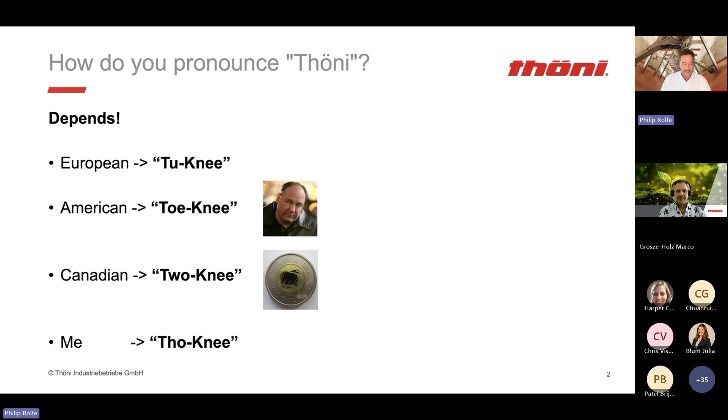How do you pronounce our name? Ever since I started working with Thoeni about 10 years ago, there have been a lot of quizzical looks about how to pronounce that for most of our North American compatriots. It really depends - if you're European, familiar with the O and the two little dots above it, you say Thoeni. An American might quite often say Tony, considering Tony Montana, Tony Soprano, and of course Canadians give homage to our $2 coin, Toonie. Personally, I go Thoeni, but whatever you call us, we're here to help you with your organics challenges.

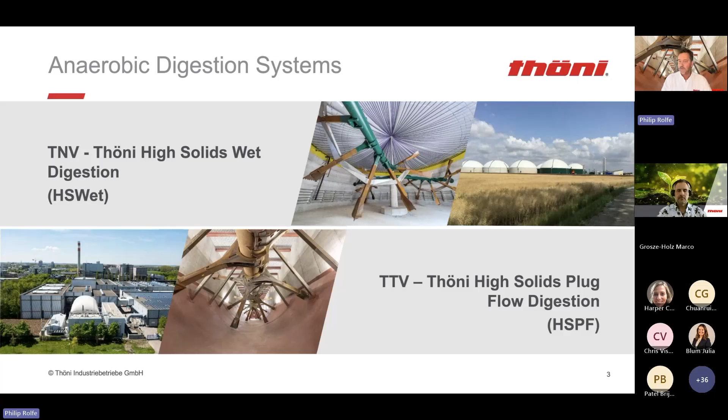Thoeni has been in the environmental business for over 30 years now, and we're really known for our high solid anaerobic digestion systems. We have both a high solid wet system, called our TNV system, and our TTV, which is our high solid plug flow system. Both are characterized by a very robust agitation mixing system, which you need to manage those high solid, high impurity feedstocks that we see in a lot of urban and agricultural settings.

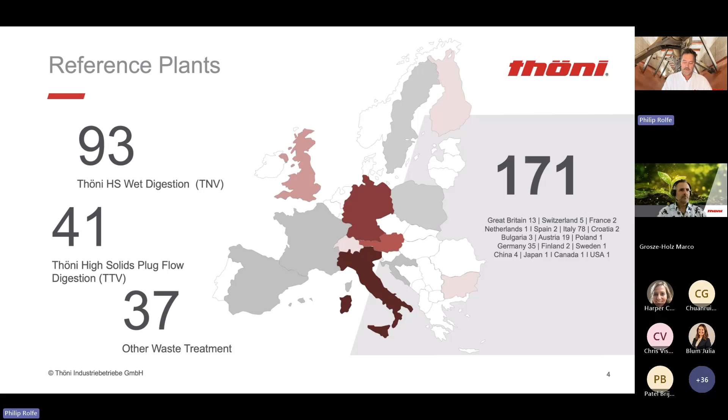We've been very successful throughout the world with our systems, primarily in Europe at this stage. We have 93 different sites handling our TNV system, our high solid wet digestion, and 41 of our high solid plug flow. So we have a lot of experience with a wide variety of wastes throughout the world.

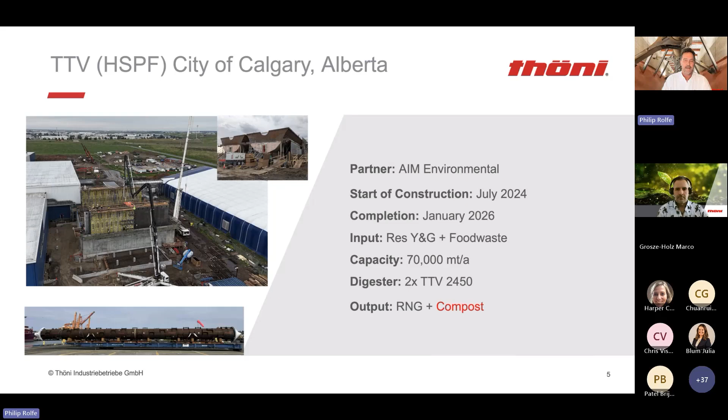To the left, you can see some recent pictures. Our 135-foot shafts, 2 of them, just got delivered to Calgary last Friday. We were happy to see those make it from Austria all the way to Calgary. And here you can see some recent concrete pouring we've been doing at the site as well. Very excited about this project, our first one, and once it's completed, I'm looking forward to touring people through that facility.

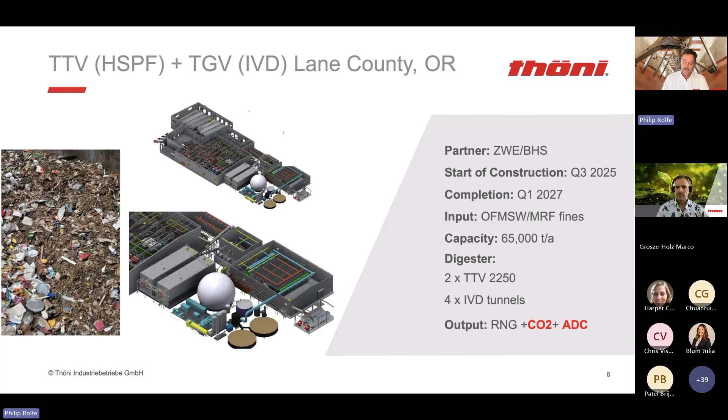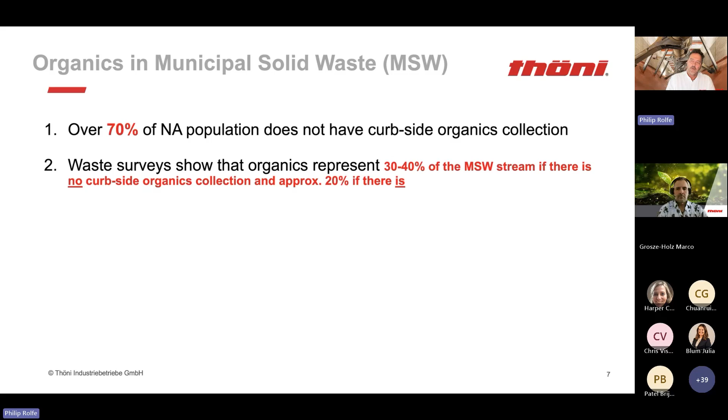What we're finding in other markets where they do have curbside organic collection, there's still about 20% of the total volume of that MSW that is organic matter.

Now, why does this matter? If organics are left in the black bag or MSW stream going to the landfill, there are significant fugitive methane emissions from landfills as a result. This happens with or without a landfill gas collection system, because the efficacy of these systems varies significantly depending on the design, the cover type, the operational practices, and whether it's a closed or active landfill.

It's a significant issue. The other issue with organics in landfills is that they take up space. As you're quite familiar with, a lot of landfills, particularly near large municipal areas, have very strained capacity and limited lifetime. So any material you can remove from that stream going to the landfill helps extend the life of those landfills significantly.

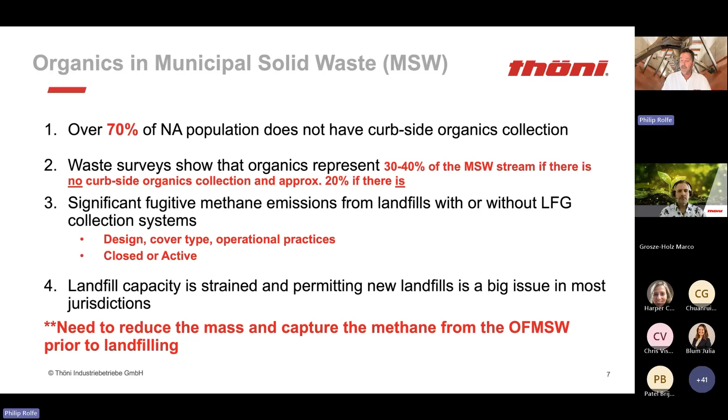As we all know, permitting new landfills is a big issue and nobody wants it in their backyard. So I think at the end, there's a real need to reduce the mass and capture the methane from the OFMSW material prior to landfilling.

Now, as I mentioned, Lane County, Oregon will be a great example of our integrated facility, where we have both a separation process up front, an anaerobic digestion process, followed by an aerobic treatment process.

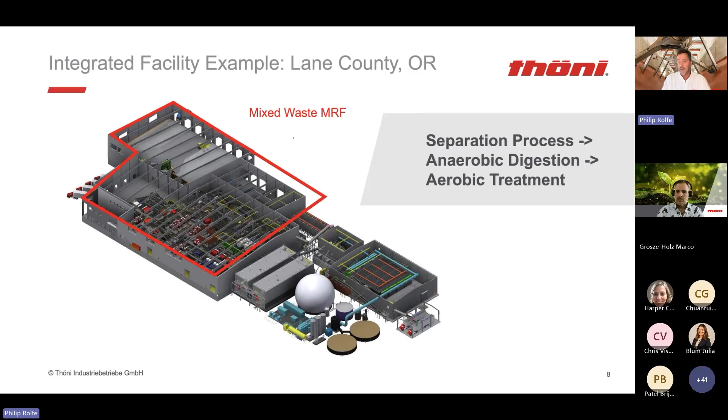In this case with Lane County, the county itself will be investing in the mixed waste MRF - the receiving area, as well as the internal separation processes: grinding, shredding, separating out the recoverable, recyclable plastics and metals, etc. But what's left over is this OFMSW feed, and that's the material we will be handling through the balance of the plant.

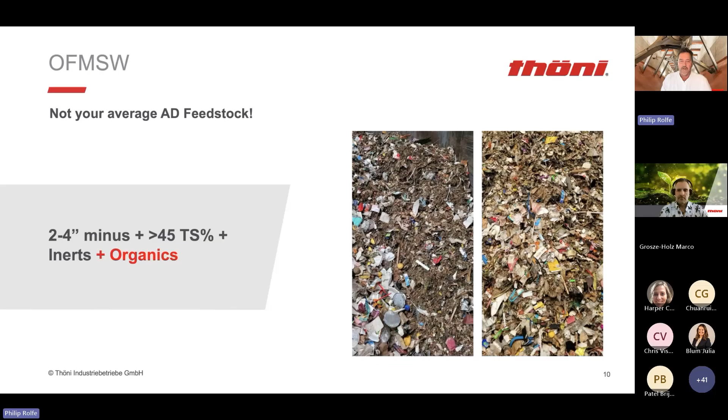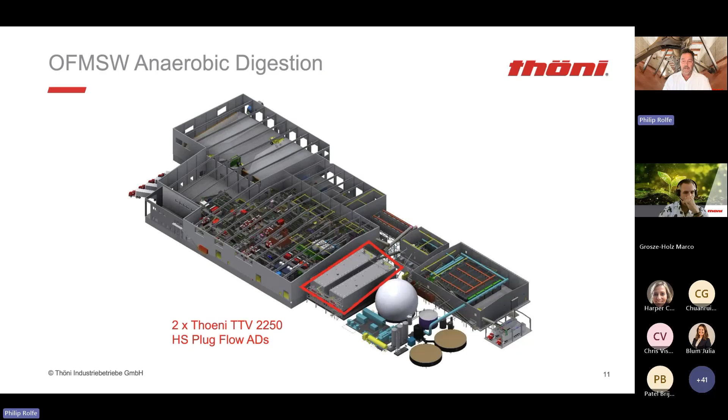It's upwards of 45% total solids, with lots of inerts, as you can see. It also happens to be where the majority of the organics in the black bag garbage are found. To handle this material, we've dimensioned, as mentioned previously, 2 of our TTV 2250 digesters, high solid plug flow digesters. In this case, we used our steel digester version.

The steel digester housings for these facilities will be manufactured in Eugene, Oregon by BHS. We did this for a couple of reasons. Back in the heydays of the IRA and the ITC credits, there was that extra 10% kicker that developers received if they used a certain percent of US steel components. So that worked very well in that case.

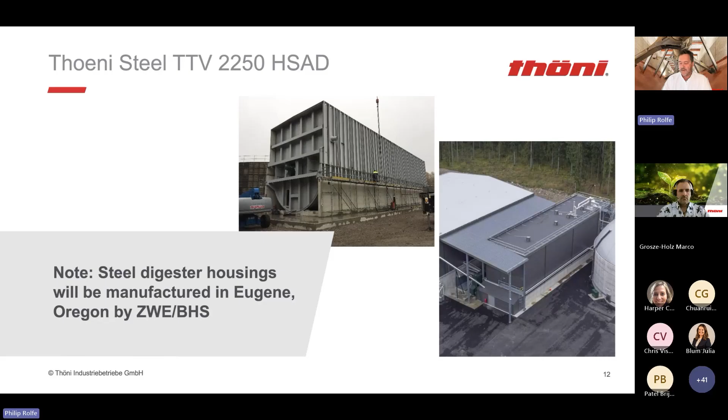But also, given the uncertainty now of the tariff situation, having a domestically manufactured significant steel housing will also benefit us and allow us to manage a little better that tariff costing on our pricing. Now, how do you take that very challenging material and enter it into the digester?

To do that, we have our patented mixer system, which consists of a couple augers that rotate in different directions in a pre-sequenced way. We take into this mixer about 2/3 fresh OFMSW, plus about 1/3 of the mass of inoculum or digestate from the back of the digester, and any other dilution liquid that we need to get that mixture down to around 32% total solids, which is our sweet spot for going into the digester.

The mixer itself has about a 9-minute cycle. Once it's finished mixing all those 3, it drops into the piston cylinder and is piston pumped through a double-jacketed heating pipe. So we get that material almost up to thermophilic temperatures before even going into the digester, and that really helps with the whole process.

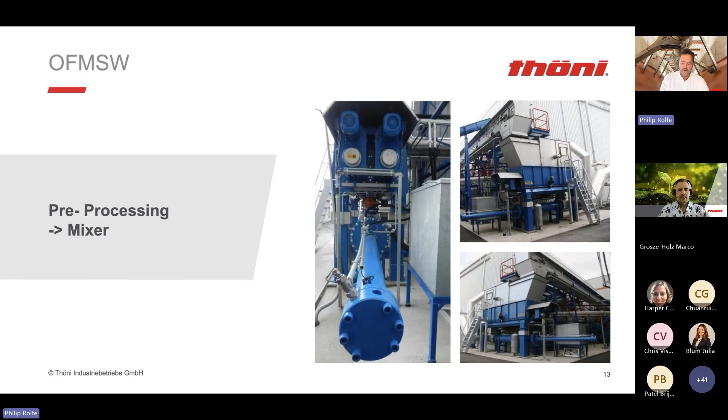Now, once it's in the digester, how do we prevent sinking layers and floating layers? How do we manage all those contaminants in that digester? This is really where some of the benefits of our system really play out. I've got a little video here to explain it.

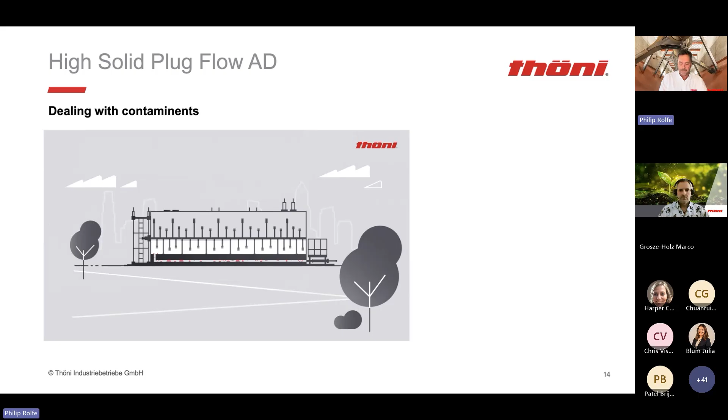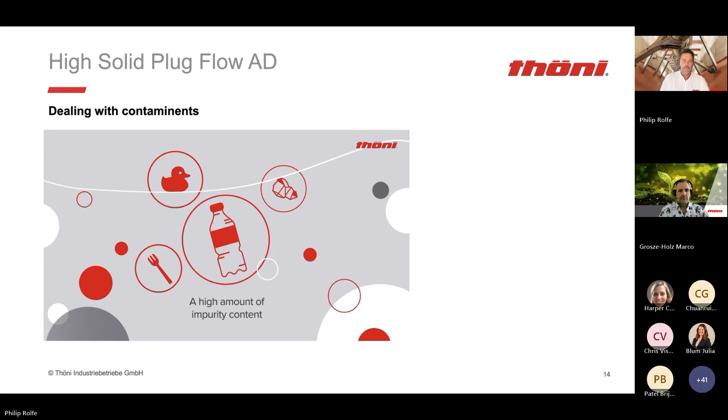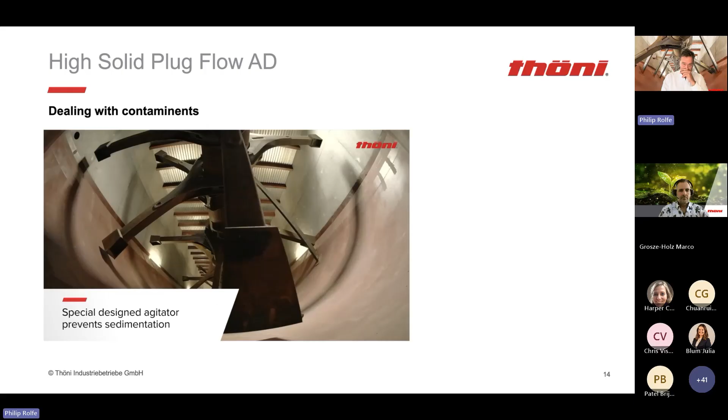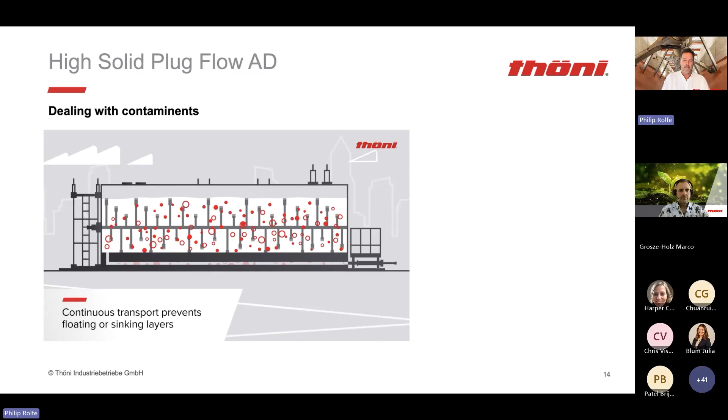High impurity content is no problem for the Thoeni TTV digester. The substrate is fed into the digester by means of a piston pump. The TTV is ideal for the digestion of organic material with a high amount of impurity content. The impurities are transported safely along the TTV digester from feeding to extraction. The special design and configuration of the paddles along the shaft prevent sedimentation and floating. That way, impurities are continuously transported to the digester extraction and have no chance to build floating or sinking layers. This ensures constant maintenance-free operation of the digester, even when the input material contains high impurity content.

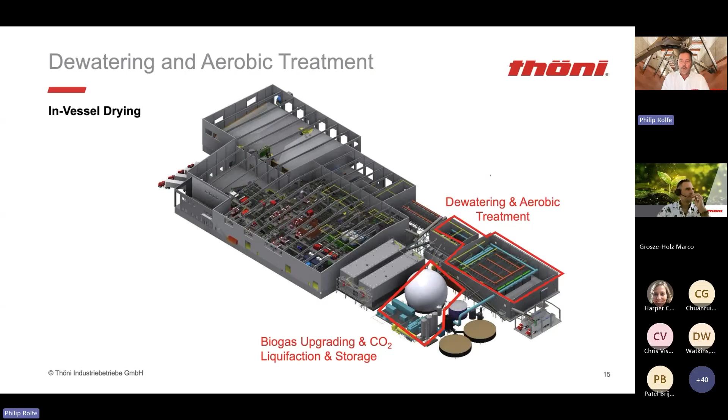After the material has been in the digester for about 20 days average retention time, it's pumped out of the digester, extracted to our dewatering systems, which are necessary. As you can see here, the digestate comes out of the digester at roughly 26% total solids.

We need to run that through a screw press to remove some of the liquids. It's a specialized screw press, I believe a Bellmer in this case. We end up with dewatered digestate having a total solids of roughly 40%. The liquid fraction comes out at roughly 20% total suspended solids.

Now, we do need some liquids, as I mentioned earlier, to dilute down the incoming material. But at 20% total solids, that liquid has too much solid and would create some operational challenges over time as it gets recycled through the system. So we run it through a centrifuge in this case, and it produces a liquid fraction of about 14 to 16% total solids, which is fine and adequate for our dilution purposes.

The centrifuge produces the retentate, which has roughly 35% total solids. That gets mixed with the dewatered digestate as well as structure material into an inline mixer to prepare it for the IVD. I'm going to pass it over to Marco now, and he'll take you from there.

Thank you, Rolfe, for this anaerobic introduction. I want to take you all into my world of aerobic treatment of organic solids.

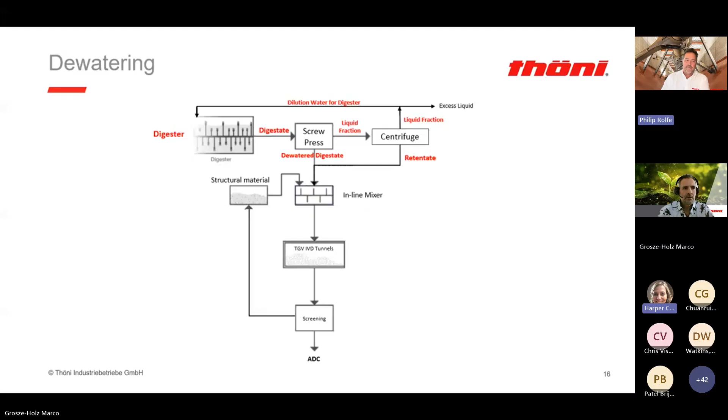So about the aerobic treatment process, where we are in the whole process of AD, like Rolfe has explained in this graph already, we are behind the TTV AD system, where we have the dewatering and the mixture of dewatered materials like retentate and digestate will be mixed with structure material and then filled into the tunnel.

We have automatic filling systems for that, and that's where the aerobic treatment happens. We do that with a fan.

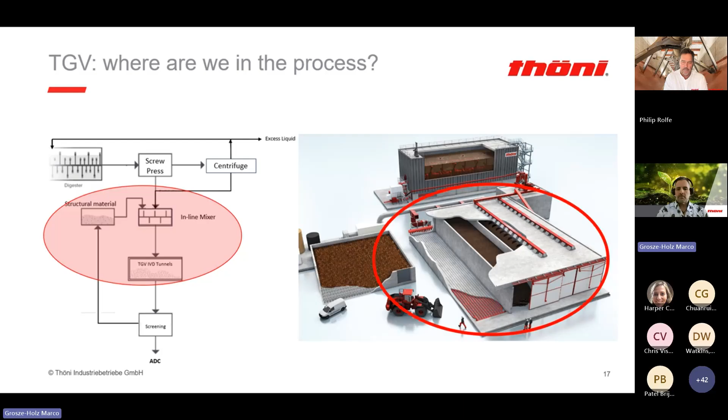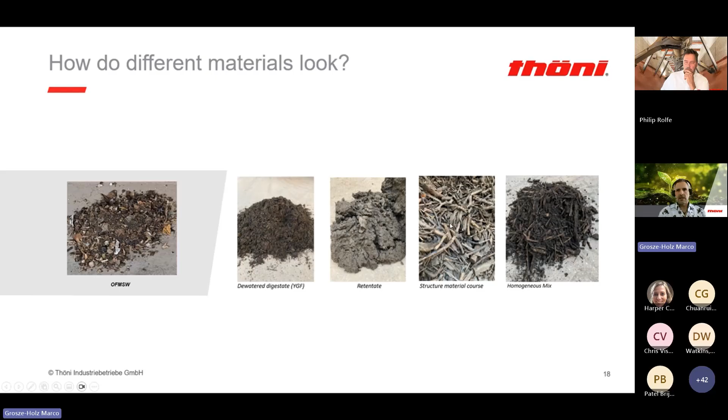How do the different materials look like? OFMSW you have seen already before, like Rolfe showed you. Then we have dewatered digestate. Unfortunately, I don't have any digestate dewatered from OFMSW because it doesn't exist in Europe. We have yard, garden, food waste instead. But it looks more or less the same, except you miss the contaminants from OFMSW. Then you have the retentate, a sludge-like material containing a lot of heavy materials like sand and other minerals. And then we have structure material, and in fact this mix we need to process in our tunnel system. The structure is very important for us because these materials are quite dense, and as we have a process where we blow air through the material, we need some permeability.

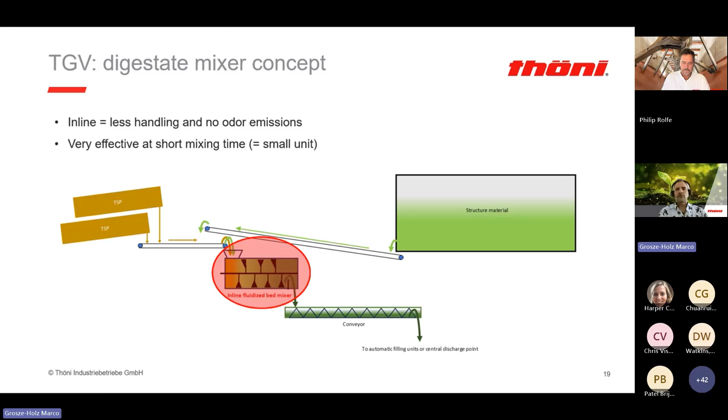How does the mixing concept look like? We have our dewatering, either the screw press or a centrifuge. This dewatered solids will come on a conveyor belt together with structure material, which we store in a bunker, and those together go with the solid dewatered materials into a fluidized inline mixer. We chose a fluidized bed mixer because that gives us the best permeability of the components we mix together. The output from the mixer goes on a conveyor, and then it can be discharged directly into the tunnels, so you don't need extra handling, or you drop it somewhere and take it with your wheel loader, but of course that's extra handling.

For this small mixer, 24 cubic meters per hour, the footprint, the width and length, is about 5 meters long, 1.5 meters wide, or as you like in feet, about 16.5 feet by 5 feet. So it's a quite small unit.

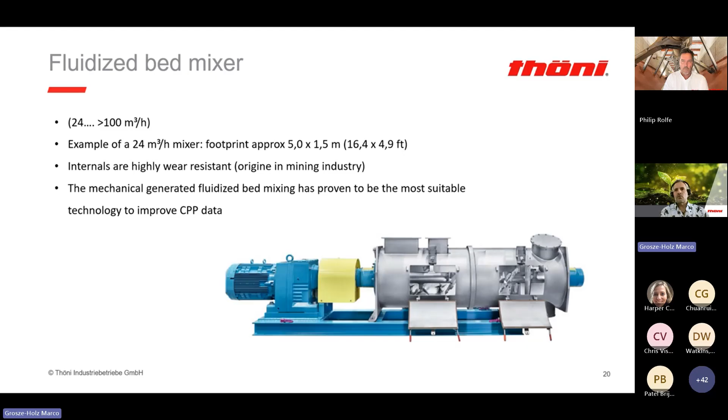The internals are highly wear resistant, as this machine has its origin in the mining industry, so they know how to keep up with the heavy wear present in your OFMSW or other solid organic material. As I said before, the mechanical generated fluidized bed mixing has proven to be the most suitable technology to improve CPP data. CPP stands for compaction, porosity, and permeability, which are important parameters for us to have a good material that can be aerated.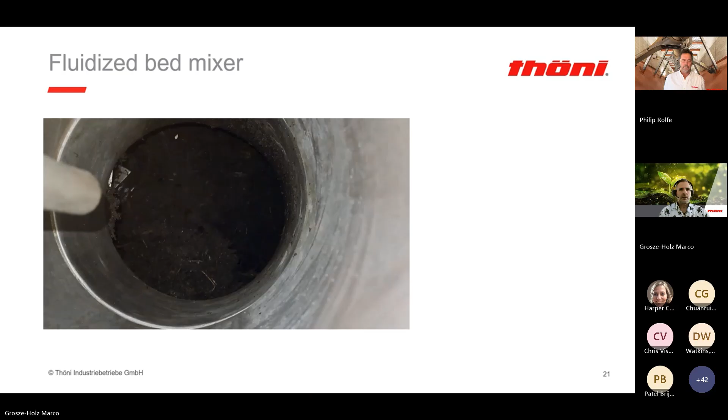How does it look like in the mixer? We have a short video where we look on top of the shaft where it mixes the material at quite a high velocity. You see that the input materials, the sticky materials, digestate with retentate, once you mix it, getting a loose mix that's easy to aerate, or better to aerate, I must say.

So the in-vessel digestate processing, which is in fact a composting technology, is a biophysical process where aerability of the material is key for success. I mentioned the CPP data, compaction, porosity, permeability. These data need to be in specific measures, otherwise the material would be too dense, and if we cannot aerate it, the process will not run properly.

If you process OFMSW, then we call the tunnel system an IVD, in-vessel drying, where the focus is on heat production and ammonia hot stripping, because that's a requirement for ADC material, which is the end product from OFMSW.

If you have yard, garden, and food waste, we call the tunnel system an in-vessel composting system, where the focus is on organic stabilization, volume reduction, and drying, and your end product is a high-class compost which can go to agriculture. The system is capable to kill pathogens if required.

We can maintain temperatures up to 170 degrees Fahrenheit. We keep that for a longer time. European requirement says you need to do it at least 3 days and then maintain 130 degrees Fahrenheit after to kill pathogens. And that's all possible with the organic material which is inside your waste, so we don't need to use external heat, but we can to speed up the process.

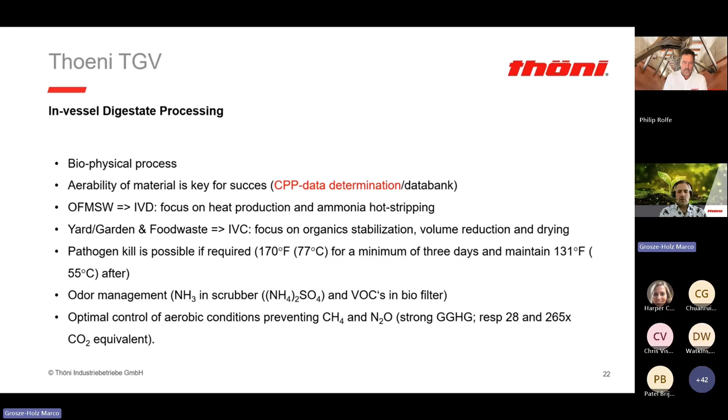With this closed tunnel system, we have optimal conditions to prevent methane and nitrous oxide, or laughing gas, emissions, which are both very strong greenhouse gases that we want to prevent emitting into the environment. For instance, methane is 28 times more potent than carbon dioxide, and nitrous oxide has a 265 CO2 equivalent. So that's a quite strong greenhouse gas. You don't want to emit them.

To understand the process in more detail, I want to go a little bit into the theory of aerobic solid processing. So what is the definition of an aerobic organic processing system? It's a controlled thermophilic process where organics degrade by microbiological activity with the use of oxygen, which is coming from air that we blow through the system, producing reaction products like carbon dioxide, water, ammonia, heat, and biomass.

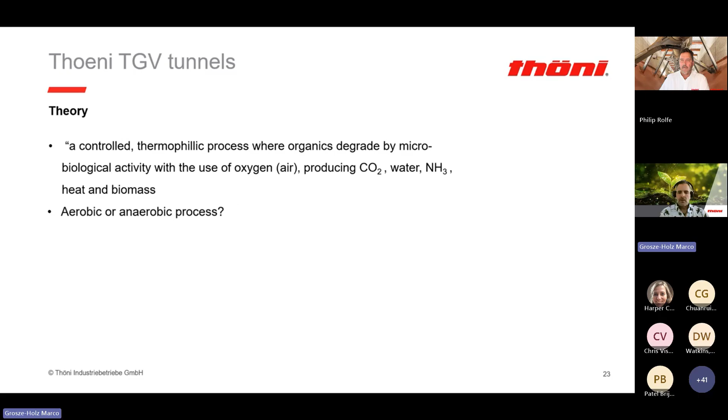Having said this, and looking at the definition of the aerobic treatment process, would you think this is an aerobic or an anaerobic process? Question for you. You can answer in the chat if you like, and I will elaborate on that.

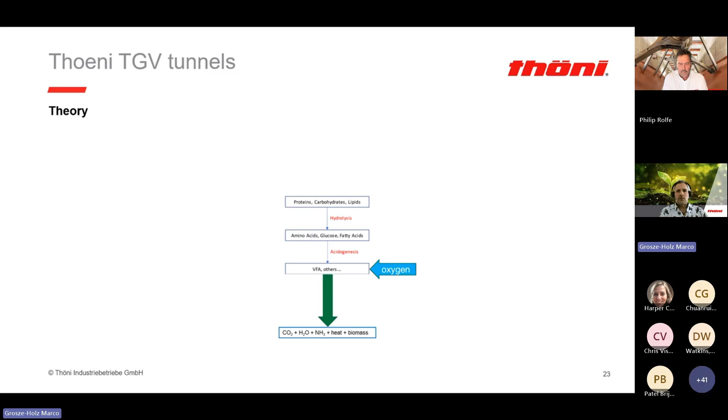If we have an AD system, most of you are probably familiar with this. You have 4 biological stages of how organics are broken down and transformed into biogas, which is methane and carbon dioxide. In the aerobic process, the air touches the anaerobic process where the volatile fatty acids will be consumed by microbiological activity and oxygen. We don't produce biogas, of course, because it's not anaerobic digestion, but an aerobic treatment, and we produce carbon dioxide, water, ammonia, heat, and biomass.

So how does it look like on a particle size? When we have an organic particle, it's a solid particle containing biodegradable organics. That's material which is not broken down in the AD, because not all organics will be broken down in an AD system. Some only break down in aerobic treatment systems.

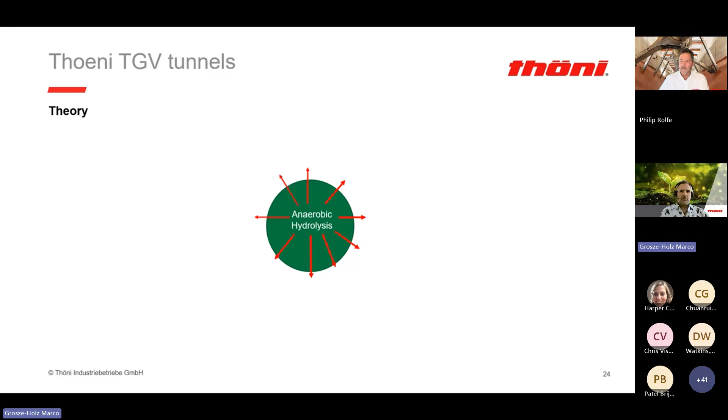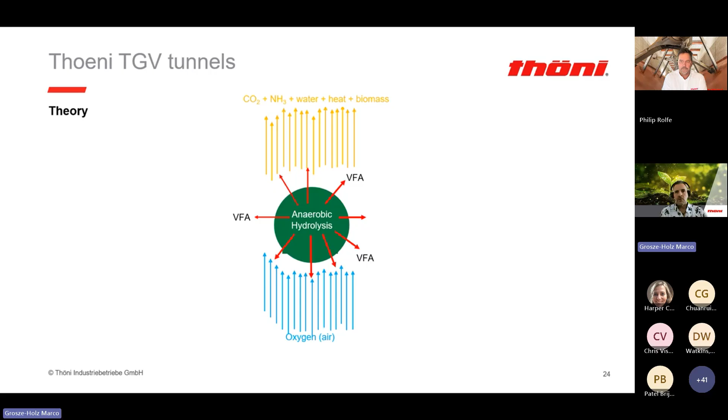In this solid, we have anaerobic hydrolysis from inside, because air cannot penetrate a solid inside. From this anaerobic hydrolysis, we have the production of volatile fatty acids, and because it's an acid, the pH goes down. Once we aerate this material, the volatile fatty acids will be consumed all the time when they are produced, and then the pH goes back to neutral, and we have the production of carbon dioxide, ammonia, water, heat, and biomass. Biomass is the microbiological bacteria that multiply.

When we focus on the heat that is generated from 1 gram of organics, we need a certain amount of air, or actually oxygen, because the nitrogen doesn't do anything with it. A significant amount of heat will be produced, about 17 kilojoules. To have a feeling about how much energy that is, that's about half a cup of water at 77 degrees Celsius -- in Fahrenheit, I think that's about 170 degrees Fahrenheit. So really hot water, tea water -- that's the amount of heat generated from just 1 gram of organics being decayed. So what happens if this heat is released?

The material will heat up, and it will heat up the whole pile and the whole facility. If we don't control the heat, the temperature will rise up to 180 degrees Fahrenheit, and this temperature is too much for the bacteria to continue. So the process will kill itself. So we need to control the temperature.

And how would we control the temperature? As we are using an air system, we blow extra air through the system, typically 12 times more air than we need for just the oxygen supply.

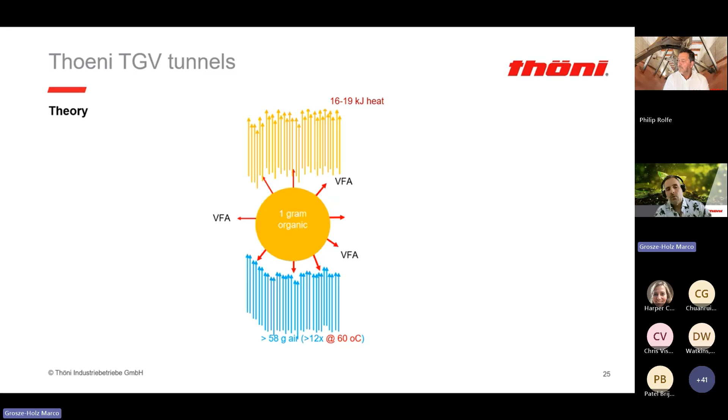And then we can cool down the process, and this is exactly how we control the process, giving it more or less air to cool down or to heat up.

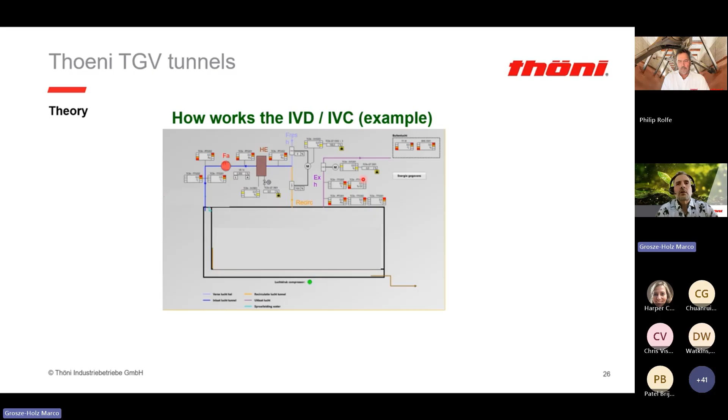And what happens then is that we close the recirculation, the fan is still on, we take only fresh air from the outside, blow it through the material, and exhaust it to get rid of the heat. Then, in fact, the process is ready. We open the tunnel and excavate your compost or ADC material. So you see it's a batch system. So if you have a facility that wants to run continuously, we have different batches next to each other, so different tunnels next to each other, to have a continuous process.

If we are talking input materials, source segregated organics, we call the aerobic treatment process in-vessel composting. And the compost, when you apply it on the land, delivers stabilized organic matter, but it's also a carbon sequestration of carbon in the soil. Compost is very important to improve your soil water retention capacity. It improves the soil porosity and the soil structure. And compost also takes care of nutrient buffering.

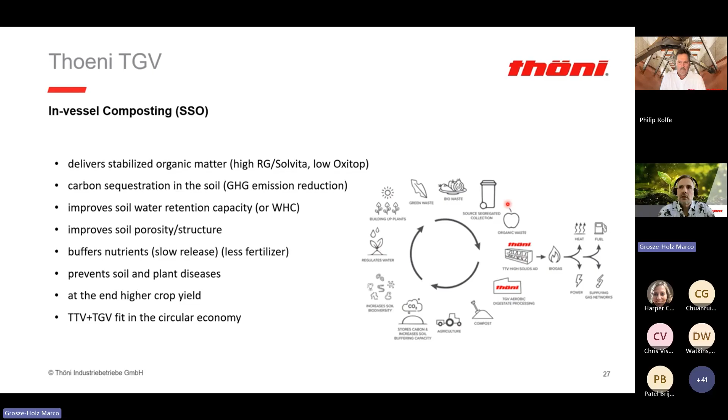If we are talking OFMSW, so you produce ADC material, we call the system in-vessel drying. And we don't have a closed circular environment. We have the input of organics in the AD system, put it in the TGV system, which is our aerobic treatment, and then you have your ADC material going to landfill.

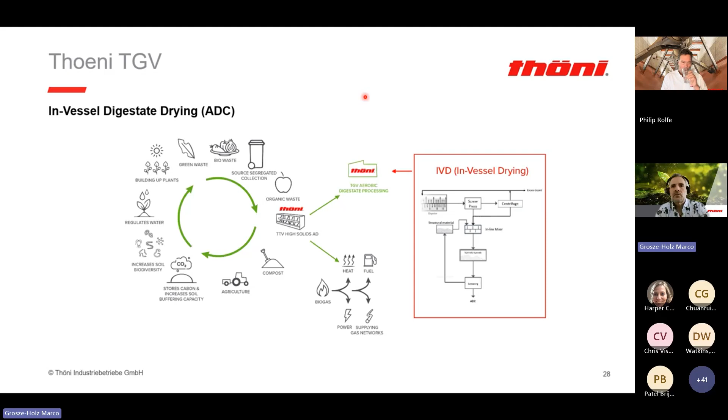Focusing on ADC material, there are some requirements. The material must be leachate free, and there's a cone test to perform, and it must be free of nuisance odors. The leachate prevention we do by dewatering the digestate, mix it with structural material, and then dry it biologically or even thermally if you have a heat source available. And for maximum mass and volume reduction, we can dry up to 80% of dry matter content in your material, but of course that needs a long retention time, so also a bigger facility.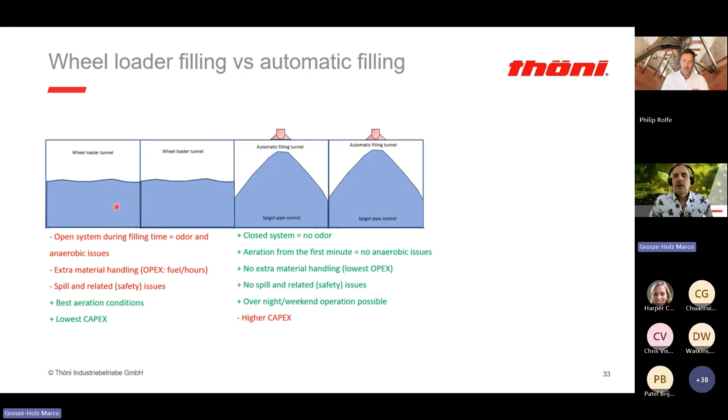And this one has the lowest CAPEX, of course, because you don't have to invest in an automatic filling conveyor. How does this automatic filling conveyor look like? It's a type of screw conveyor with dropping gates, and the material is filled here, transported to the end, and every dropping gate is filled one after another. Once the last is filled, we get a signal, then all the gates open, it drops the material in the tunnel, they close again, and the process repeats.

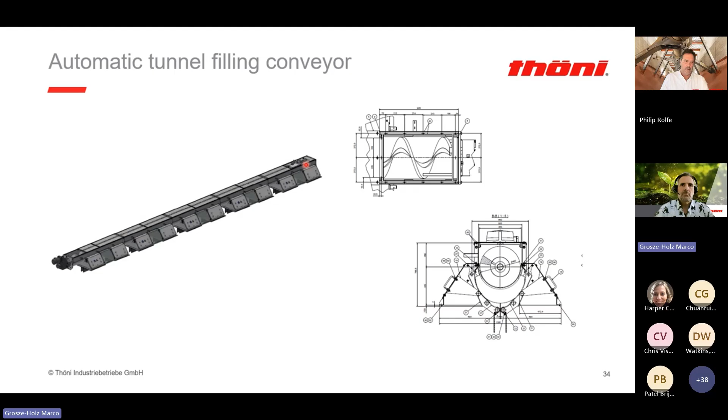About the aeration, of course we have an aerobic process, so air is very important. For this aeration, we built air handling skids, and that gives a big advantage that you can construct your air handling unit in a workshop, so you have clean conditions to make a nice skid. The most critical components for processing are already built in, so temperature probes and pressure probes are already built into the skid. As it is a skid, you can FAT it before installation, and on the construction site it's easy to install this skid and connect it to your tunnels.

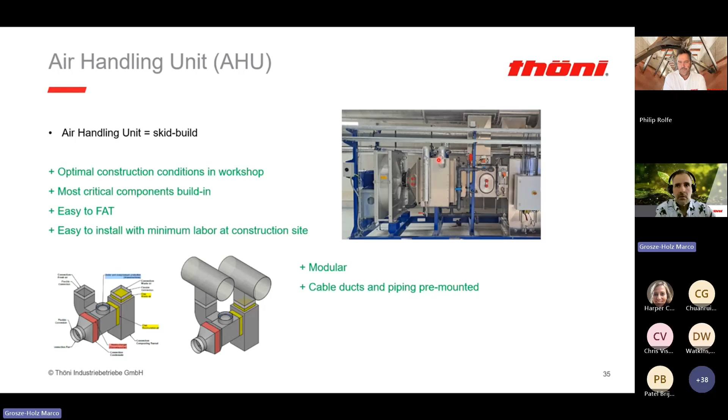Because the tunnel system is modular, we have a modular system with this skid as well. On the skids we can also mount the cable ducts and piping for your heat exchanger, which is in this box. We can pre-mount it, so your installation on site is very limited.

Where do we position these skids? We can either position them on top of the tunnel or on the back side of the tunnel. It's very much depending on customer requirements, but also on the layout of the facility.

What we see here in this picture is that this fan has its exhaust on the top. But what we do is make the exhaust of the fan on the bottom, so all condensate which occurs or will form in the ductwork will go together with the airflow out of the fan and go to the spigot pipes. We have a spigot pipe aeration system, and that has a condensate trap at the end, so we don't need any extra condensate collection piping from our air handling units.

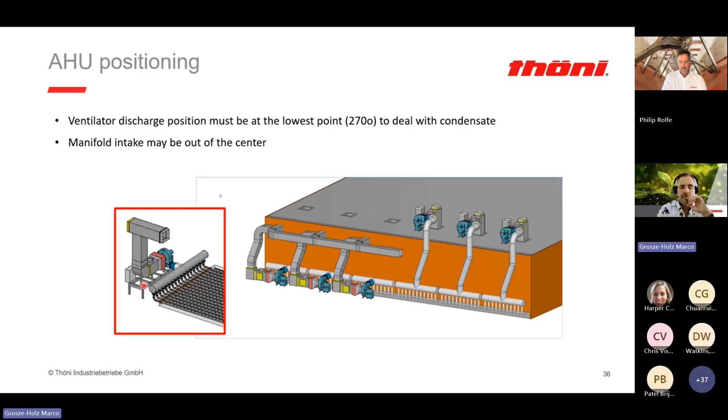I very much get a question about how do you control or check your air distribution in the spigot pipes, because the spigot pipe has many nozzles, and of course on the left side of the tunnel, right side of the tunnel, front or back, there could be a difference in air distribution, which we don't want. So the spigot system is designed in a way that we have an evenly air distribution.

I can show how even the air distribution is using ping pong balls. You have a little video here. You see the ping pong balls floating on the air stream coming from the nozzles. Once the ping pong balls have more or less the same height, we know that the air speed or the air capacity from each nozzle is more or less the same.

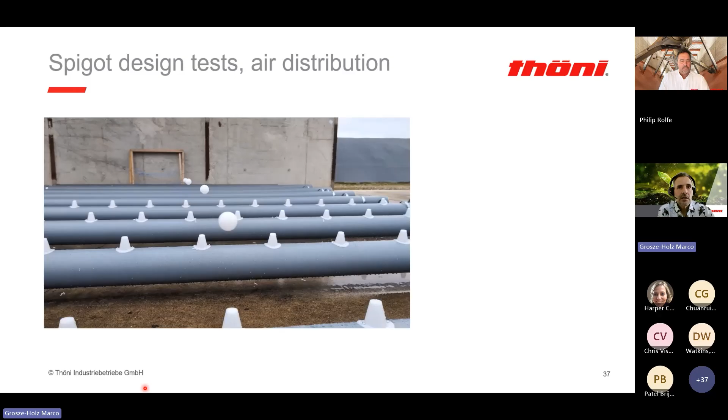This is a test facility where we test our spigot pipes, and we found out by measurement, pressure and air velocity measurement, that the deviation in our air distribution is less than 10%, no matter where you measure. So we are always within 10% difference of air distribution.

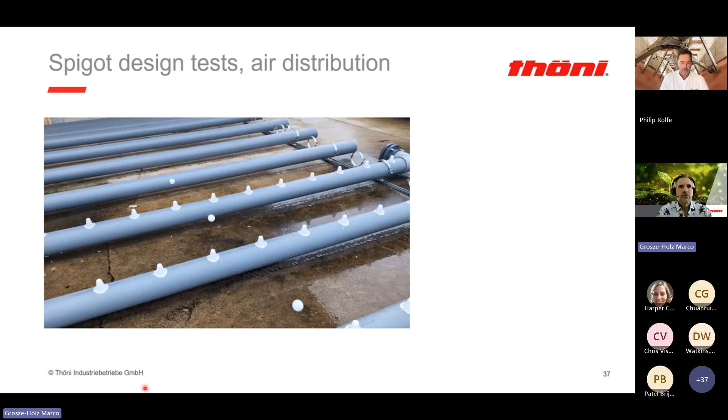Thanks, Marco. I think we'll all agree aerobic processes are a lot more complicated than anaerobic processes, but I appreciate you going through all the details on that, Marco. So what have we seen today as we're wrapping up our webinar here? We've seen the anaerobic digestion of mixed waste organics via the Thoeni TTV high solid plug flow system, which allows the production and capture of methane and CO2 from that organic matter, as well as weight reduction. And we've also seen the aerobic treatment of the resulting digestate via Thoeni's TGV system.

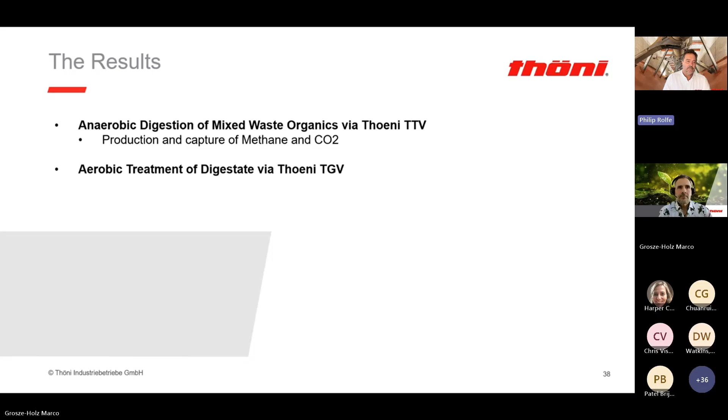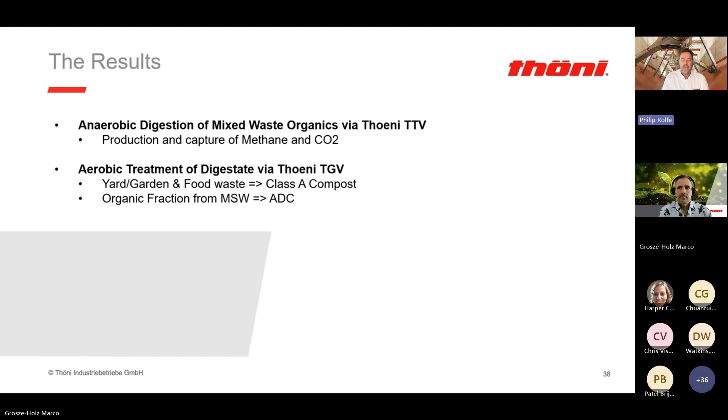And that, click the next one. Depending, as Marco mentioned, on the feedstock, if it's yard, garden, and food waste, we can produce a Class A compost using our system. And if it's organic fraction from MSW, we produce the ADC that meets the cone test as well as the odor tests. So what we wanted to show in the webinar was that you can get both an anaerobic and aerobic integrated solution from one supplier, and that's Thoeni.